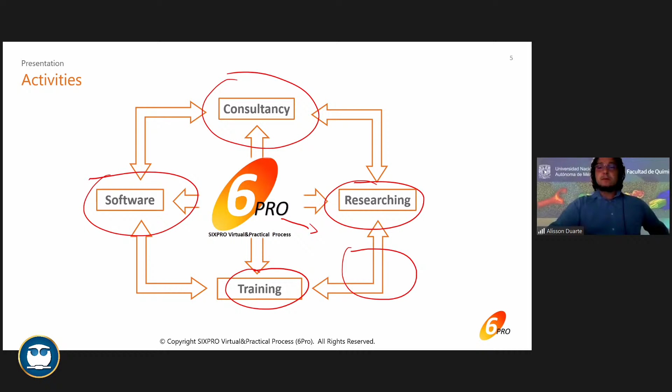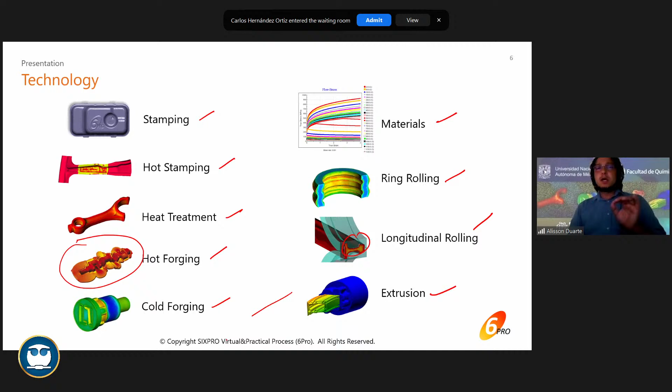Well, the main processes we work with are stamping, hot stamping, heat treatment, hot forging, warm forging, cold forging, materials, ring rolling, longitudinal rolling, profiles, plates, flat, and also extrusion. When we say extrusion, sometimes we have steel extrusion. We put that in hot forging. But when we talk about light alloys like aluminum, magnesium, and long profiles, then the extrusion has specific features that are needed. So that's why we make this difference between hot forging and extrusion, I would say extrusion of light alloys. All right.

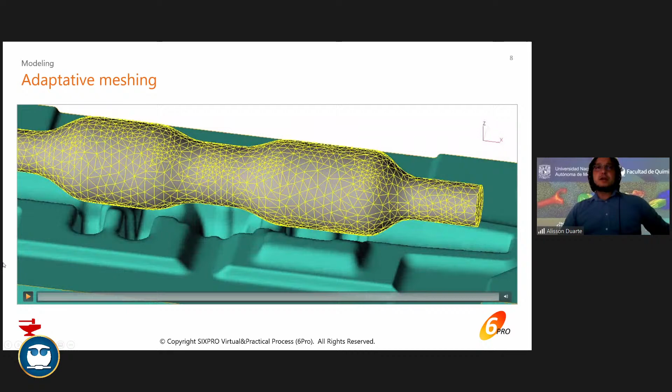So it's interesting that in this case, as you see here, the part forged is this here. This is all the part forged, okay? And we have this shaft on it. And as you can see, in these areas we have bigger elements, and this area here is a very thin area, so we have smaller elements over here, right?

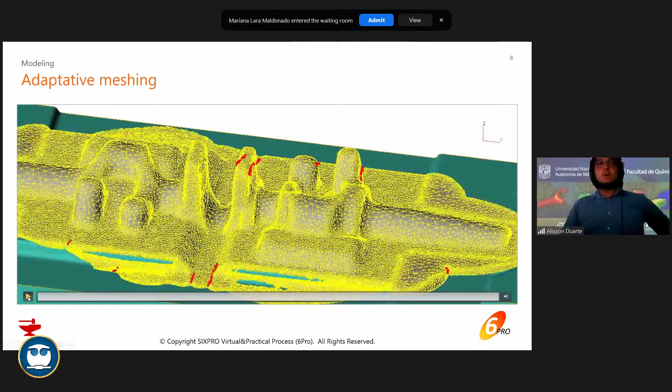So what we have in QForm is not a remeshing, no. It's a technology we call adaptive meshing, because the mesh is adaptive depending on the need, depending on the geometry, curvature, the strain distribution, temperature distribution. So we have this adaptive meshing. And here is an example of an open die or closed die forging operation. All right, so that's what we're talking about. So I will show this video one more time. All right.

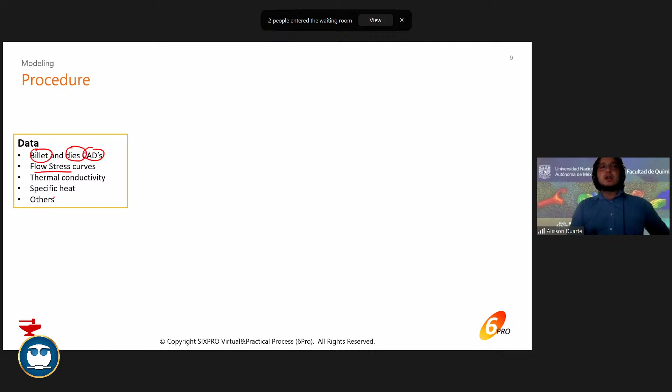Okay, in order to do this, we need some information. First, we need data. We need data for the material, and also I need the CADs for the initial billet, the dies, also the material data like flow stresses, thermal conductivity, specific heat, and others. Once I have those data, I need to set up the simulation. So positioning is important. Which type of equipment, let's say a press or a hammer, which are my process parameters, temperatures, furnace, which type of friction, heating, and other boundary conditions that are possible to include in the setup.

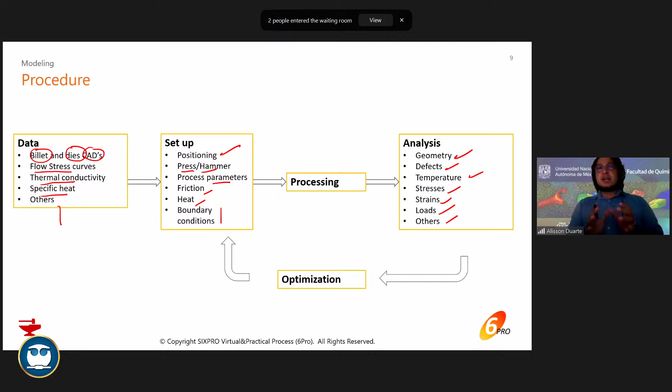Then the software works on it, okay? Then you have this processing. After processing, you can analyze geometry, defects, temperature, stresses, strain, loads, or you can analyze the dies. I'm going to show you a few examples here. It's pretty nice. And also, this is a simple way. When you do a setup, you process and you understand what's happening in the processes.

But in the software, we can also optimize parameters. We can optimize the manual setup of the simulation. So we are really working further here. We have, for example, API, and API is when you can actually put your software, QForm, in contact with other software. We can also think about putting it in contact with your presses, with your equipment. So you have this interaction between the simulator, QForm, and also equipment and other software. It's very nice. Sometimes you can even run a simulation without even opening QForm. So you do everything from other applications. It's very interesting, and it's really developed.

All right, I know it's too much theory right now, but let's go further so we will understand that. Temperature and strain rate: here's an example of the importance of having good material data, because if you get a material at 800 or 1100 Celsius degrees, of course the material at 1100 is easier to be formed. The material at 800 is harder. So you need to have information for the material for different temperatures. Also, you need to understand that for each temperature, let's say 1100 Celsius, the material can behave differently depending on the press speed, depending on how fast your process is.

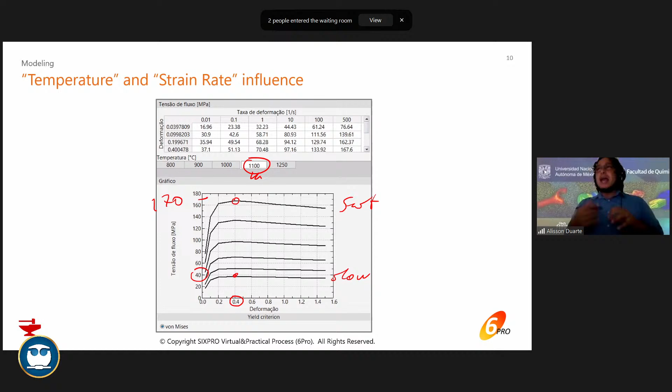If I do a very slow process, for deforming my material at 0.4 strain, I would need around 40 megapascal, right? So that's what I would need. However, if I go fast in the forging process, the same material at the same temperature, I would need a lot more stress. It means I have to apply a lot more force in the press. Also, the dies suffer much more because I put much more stress in the dies. It means you can break the dies, and these questions are answered when you actually simulate the process here.

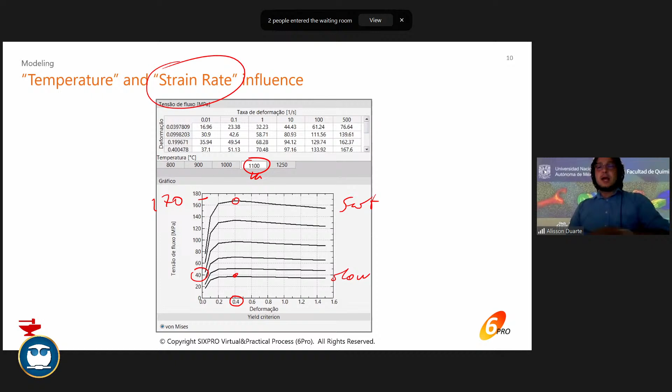So you work with different temperatures, different strain rates, and that's very important. And you understand the reflection of the results in the part, defects, presses, and also the dies. It's really important. Okay, so you have this idea of the importance of the press speed. Let's get here. This is a hydraulic press. This hydraulic press is going to be very slow, and it's a customer of ours. They do open die forging. So there's a huge bar here, and let's see.

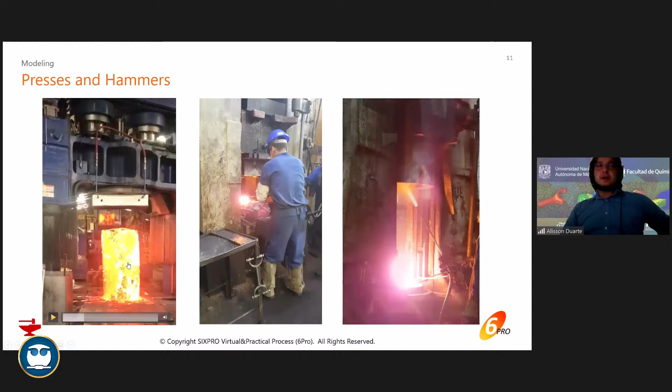I think it's enough. So we're going to see that it goes upsetting this big bar slowly. Then you have this mechanical, this is a friction press, and you can see. So it's interesting. Here you have two blows with the same die. It's faster than this process here, this hydraulic press on the left, and in the center we have this friction press, and you do two blows.

It's faster. Now here we have a hammer. So the strain, the deformation of the parts, it's really, really faster. And all those parts are at the same temperature, probably at 1200 Celsius. However, here it behaves differently. Let's see how fast a hammer can be.

Well, yeah, I recorded those videos myself, from our customers, and they allowed us to show it. And we have already simulated all of those processes. And it's really important to take into account the material behavior at different speeds, at the different strain rates.

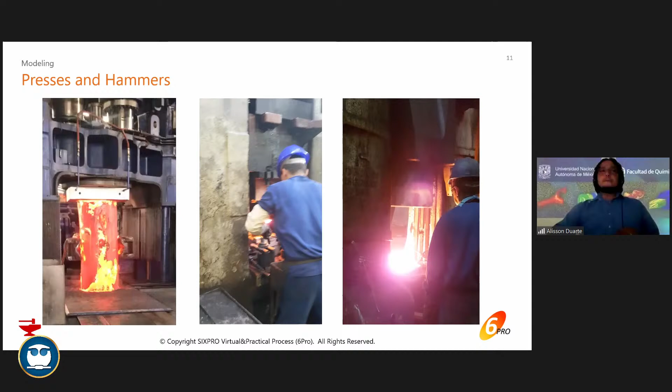All right. Okay. So how to get that material data? For forging, the most common way is to get, for example, compression tests. Compression tests, you can see here 5 specimens, and they were all compressed. And from those, we get material data.

That's one possibility. Another possibility is to get software that already simulates the behavior of the material that we need. For example, this is JMatPro. So in JMatPro, I can input the chemical composition and provide more information, and then I can export, for example, to QForm. It's possible. So you have tests, you have simulation, and here I'm not talking about simulating the process yet. I'm still talking about the material, because material data is important.

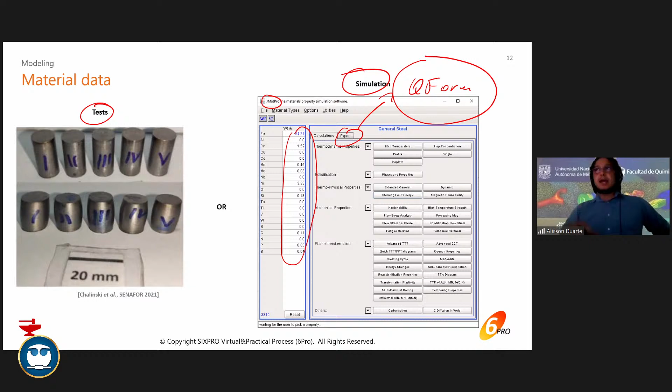QForm presents us a very large amount of material already there in the library. But here it's important to say this is only the flow stress. So I need this for different temperatures, okay? From 20 to, let's say, 1300 Celsius. And also for each temperature, I need, let's say, at least 6 speeds to have a wide range of behavior for that material.

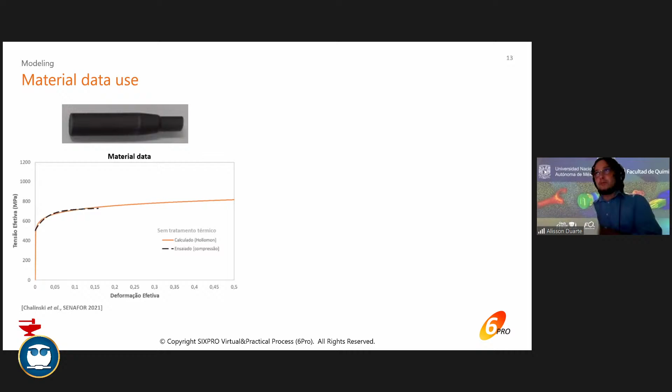So material is really important, of course. And here, from these, we got, for example, the behaviors, the flow stress data. So you have this experimental, and then from the experimental, you get this complete curve in order to simulate. Then we simulated that, and you could see that experimentally we had around 400 kilonewtons in the press. While simulating this, we got pretty close.

It's a real case, and it was very important to define before doing the experimental. We defined it with the company. This is one of our customers as well. If you want to see the paper, unfortunately it's in Portuguese, but the paper is there.

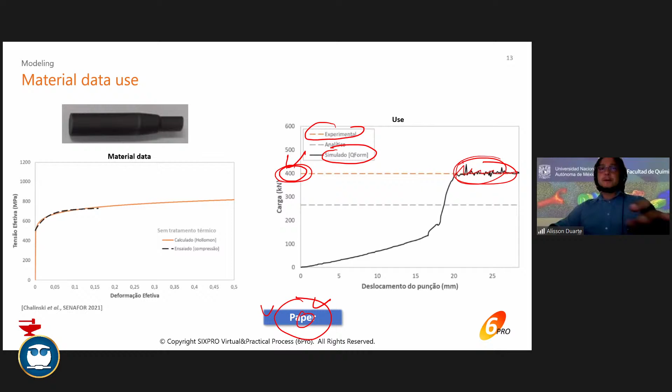Before going into the press, we simulated and we found the necessary load for the process. And when we went to the press, we saw that it was in accordance with the simulation. All right.

Also, it was a cold forging, so the matter of the dies is really important, because the dies suffer many stresses. So we also have to check at least the effective stresses in the die. So you can see here, the die is assembled from 3 dies. So 3 dies make the tooling.

And also this company has other dies here. They are shrink fit, other dies here. So they can decrease the tensile stresses in the dies, which is very important, and also decrease effective stress. It's not shown here because it's a matter of confidentiality. However, you have effective stress here.

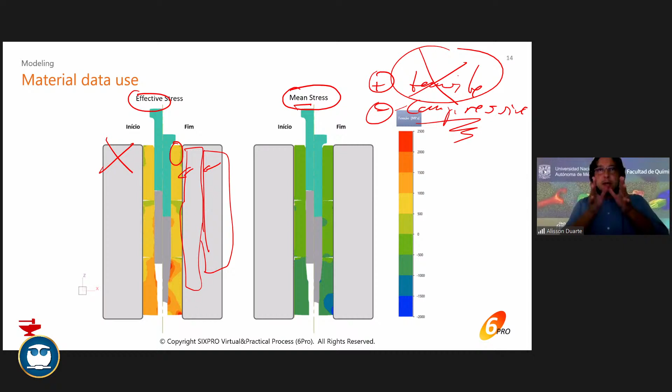And another important thing is to check the mean stress, because the mean stress says if we are too much in tension or if we are in compression. So the idea is to get compressive stresses rather than tensile stresses, because they can break the dies. It's very superficial here what I'm talking about, but we have much more, you can take a look into the dies and analyze those dies.

You can even define the number of blows, the number of parts until the dies fail or would break by fatigue, okay. So there are many possibilities. Okay, here, as I said, it was about the modeling.

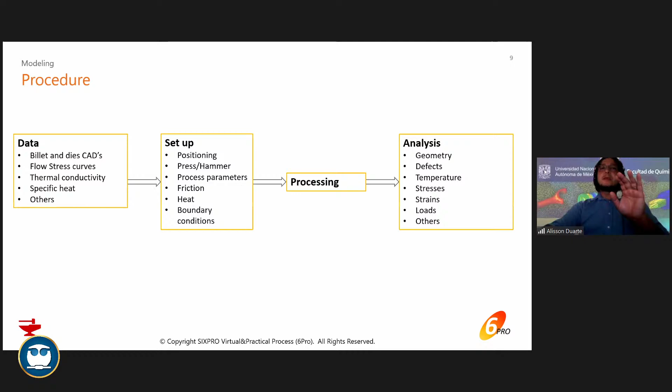It's a general idea. Now that I gave you the general idea, I'm going to show a few examples of what we can do with forging. I'm going to focus on forging. The first idea is we can conduct open die forging operations.

As you can see here at the top, I have what we call a manipulator, and it handles a big bar, and this bar is then pressed by dies. For simulating this, I can consider this geometrical manipulator, or to make it easier and faster, I can also use this graphic manipulator. The manipulator moves the part and rotates it also, so it makes it easier to simulate this process.

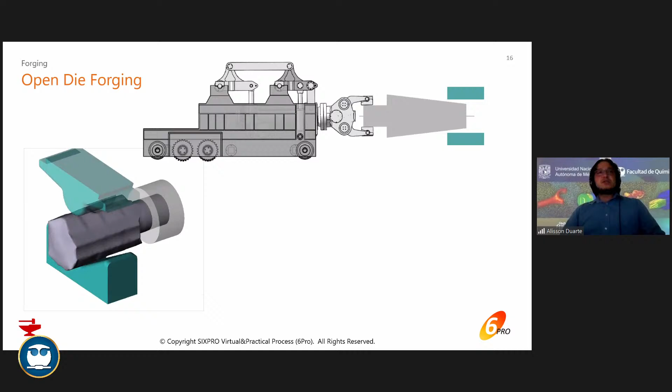So this is an example of open die forging. I was saying graphic manipulator, so you have for general analysis automatization of the simulation, to make it faster. Also geometric manipulator, you make positioning, sometimes it influences the shape of the forging or the part being forged. And so you can check positioning, heat exchanging, how the part loses heat to the dies, how dies can deflect during the forging process. You can check these and much more.

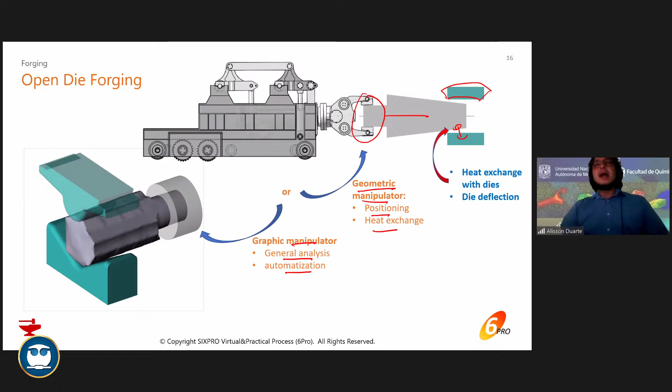All right, I already showed you this closed die forging for you to have an idea. This is also cold forging. As you can see, cold forging is very, very tricky, and we need to consider a lot of dies. You can see every die has a correlation to the other. Sometimes it fits, sometimes there is a distance between dies, sometimes there is nothing, it's just there. So as you can see, just to do this very simple part, a lot of tooling, a lot of tools, we need to do this.

I'm going to show this here. This is the final forge blow, and you can see here it's forging there. All right, then the final forging blow finishes the part.

Over here you can see the punch, how the punch deflects. Of course, it's pressing, there's a load, and punching the part, and you can see that this punch dislocates or goes more than 1 millimeter up. Also there is an increase in the diameter. It might be a problem or not.

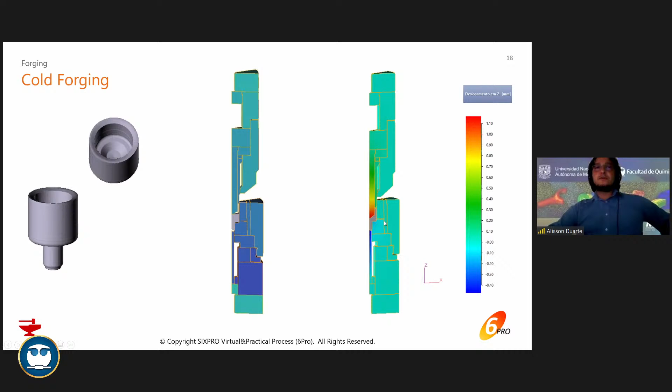Another type of operation, electric upsetting, is when you have one electrical contact, and there is electrical current passing through the part, so the part gets heated, and you do this forging by electrical upsetting. It's interesting, it's a possibility. Maybe a few people know it, but it's interesting.

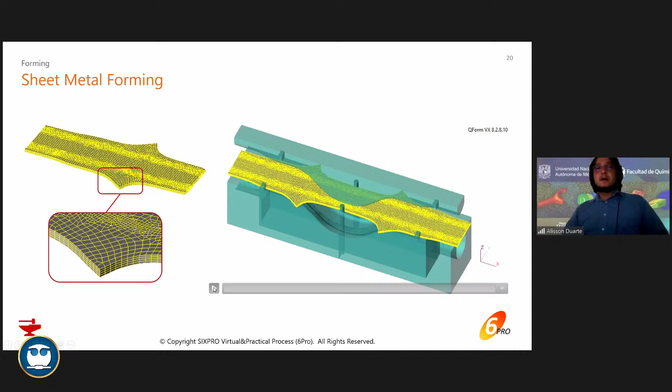Also I put here forming. You can also, I'm talking about forging, but you can also work with sheet metal forming. As you can see here, this part is going to be forged or stamped in order to get this truck part. You can see there, and you can actually design a much more precise part or a much more precise process. We do that every time for many companies, and it's pretty interesting. It's challenging, but when you see the part there working on a truck or working on a car, working on equipment, it's very nice, and the equipment is very nice.

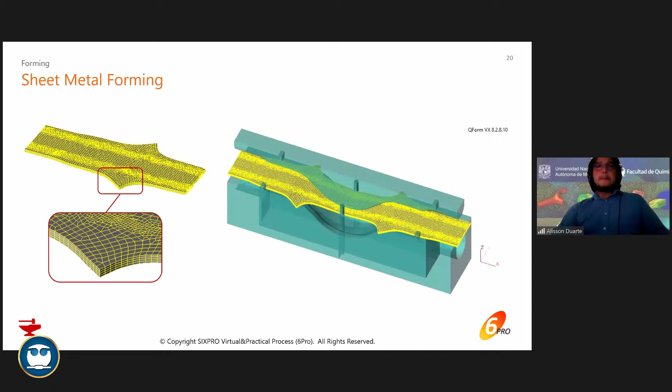Underfilling - of course, if you have a process where the metal doesn't fill your dies perfectly, you have a problem. For example, my part was designed to be here, also down here, also all up there, so there is this underfilling. It's a problem, so I have to work on this part in order to actually get the fulfilled part, and then I get the right final forged part. This is unacceptable, so it's a scrap, and you lose money, you lose time, and so on.

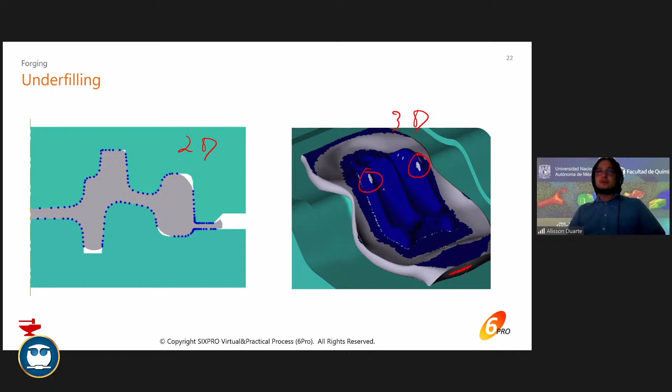This is a 2D view to make it easy to understand. You also have a way to check this by 3D simulations. It's very interesting, very nice.

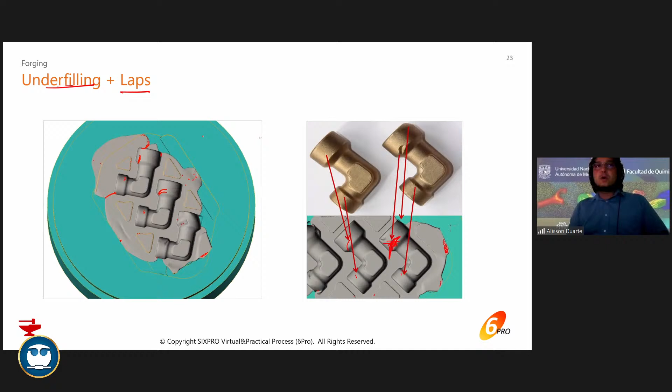All right, there's this together, underfilling and laps. A lap is when you have material that goes against itself. Like here, this part is coming to this part, so you have what we call laps or folds, and so you have underfilling, and some small laps here. It's a problem because a lap is like a crack, so it concentrates stresses. And when you use that part, it's going to break there, because a lap concentrates stresses. It's a problem, and we have to avoid laps.

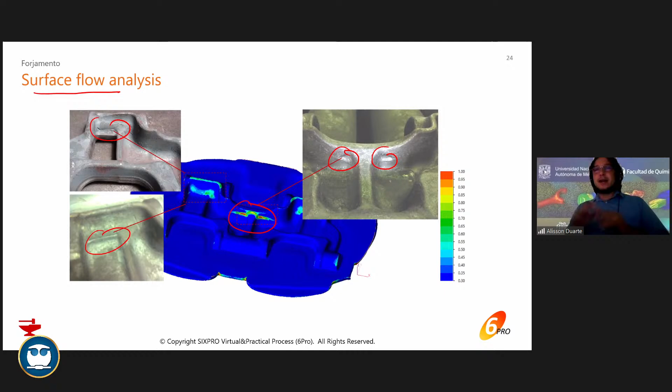Well, other analyses like surface flow analysis, you can see problems here. In a simulation, you can check by color. It's very easy to understand, to see it. You don't need to understand the actual finite element, you just need to understand the process. Nobody, if you don't have skills using software and codes, you don't need it, because the software is already set to provide you easily all the results you need.

All right, I showed you a little bit about defects in forging, now about die analysis. For example, if I have this die, it's a bottom die, you can see that I can check first of all the effective stress. You're going to see that I have very big or high effective stresses here, that are coincident with the areas in the die that will break.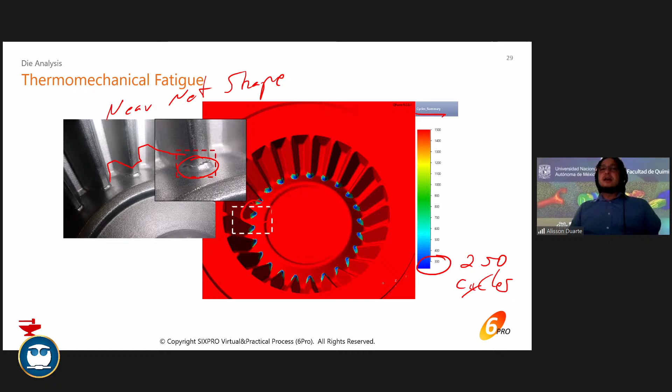Here they tried to optimize this gear, but there were too many stresses, and it broke here. And in the simulation, you can see that right in that area, the simulation says, all right, around 250 cycles after that, the die is going to break.

The die is going to suffer a fatigue failure by thermomechanical fatigue. And it's possible to measure or have this dimension in the simulation, like an average amount of parts that I can forge before it breaks. But this is very, very critical, and sometimes the companies go there and try it by trial and error.

But you need to conduct the simulation because those dies are very expensive.

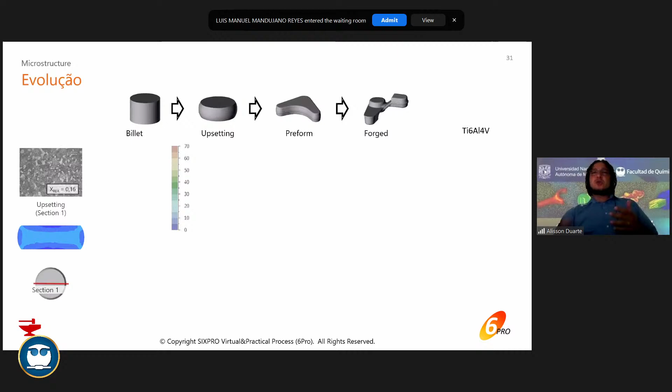Also, you can check microstructure. I'll show you an example here. I have this billet, then the upsetting preform and the forged part. You can check the grain size because you have a scale, and you can check the percentage of recrystallized material. As you can see in this micrography, you can check the same areas and understand how the grain recrystallizes, how the material recrystallizes, how the grain increases, and how much it increases or decreases. That's very interesting to check in the simulation.

I'm talking about this very fast, but I'm going to provide this presentation to you, and also some videos. I will also make a comment about heat treatment.

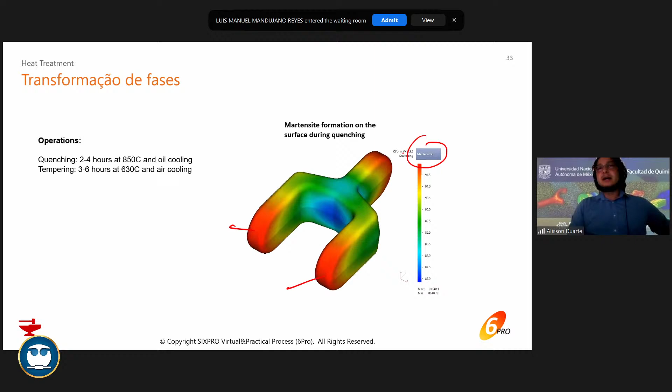It's important how, for example, we can check to conduct quenching and tempering. Here is a fork for the aerospace industry, and here you can simulate the amount of martensite. In areas where the cooling is faster, you have much more martensite, and where the cooling is slower, you have a lower amount of martensite. Then you have this distribution of final properties like hardness and mechanical resistance. So you have all of this. In this case, we have this checking point here, and you could see a lot of martensite there.

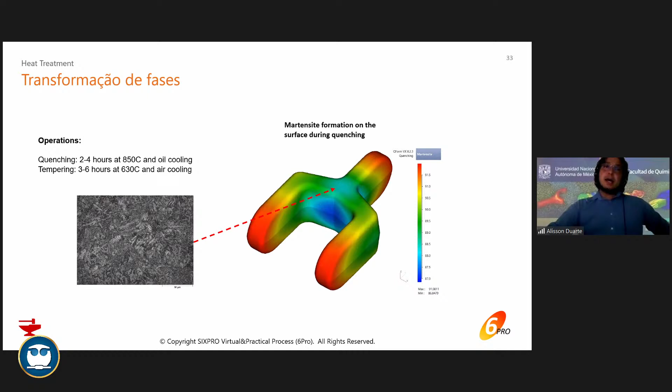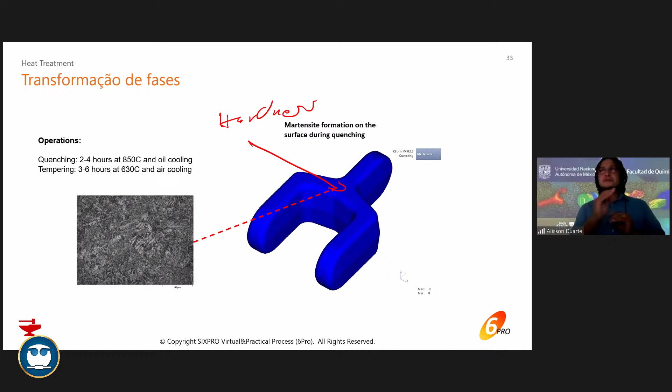We did also one trial because, let's say, you have a specification of hardness, and you say, okay, I have my process here, very good. However, the material has a range of chemical composition, and that changes everything. It changes the transformation curves. For example, for the same alloy, if I take the bottom limit and the upper limit of that alloy, at that point I can get from 430 Vickers up to 600 Vickers, which is very wide, sometimes not acceptable. Sometimes you say, okay, I'm going to do this heat treatment and make it work, but sometimes it's not in your hands. The material can provide very different results because it behaves differently.

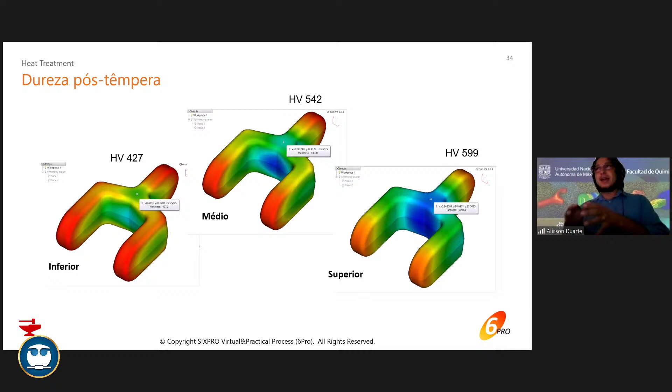It's important that we simulate this beforehand, because I have to design a more stable or robust process. I have to understand that the material can provide this wide difference, and then change the way I do my process to consider that variation and have a more stable final result. By simulating heat treatment, you can simulate a lot of different processes and variate a lot of variables. This is important because most forged parts are preheated, or heat treated afterwards.

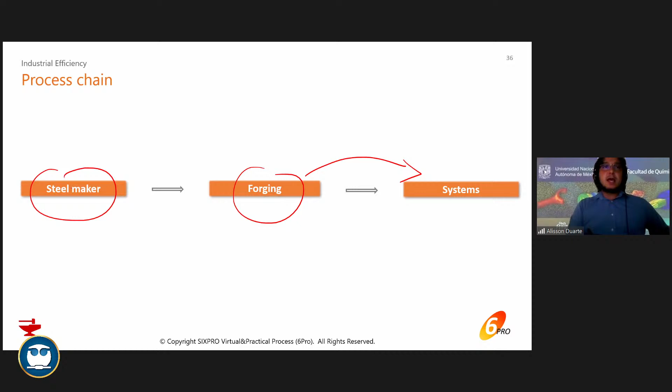So I'll go through this process chain in industry. It's very easy: I have the steel maker, then a forging company that purchases steel, and then it forges and goes to some companies that mount or assemble it, like automakers or truck makers. So we can simulate forging or forming everywhere.

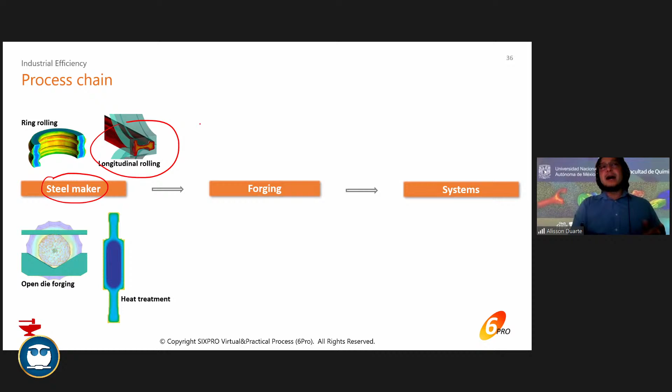For example, the steel maker many times also rolls. So if they have a siderurgy, they roll their own steel before selling it. You can roll it and sell bars to the forging industry, or sometimes sell rings, or sometimes sell very big bars, probably heat treated. So the steel maker, before forging, already uses steel forming to provide good parts or good billets to the forging industry.

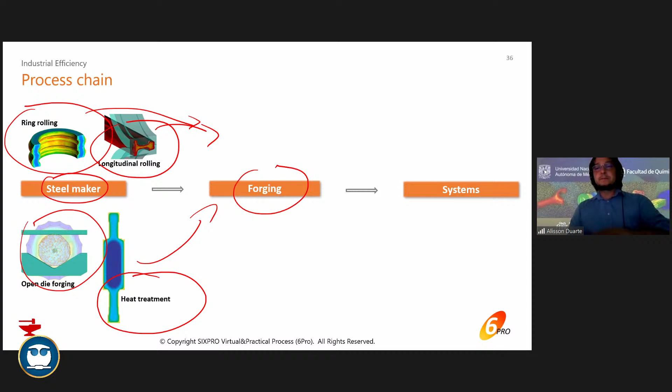In the forging industry, you can also have open die forging, closed die forging, heat treatment, ring rolling, depending on each company. Forging also sells the parts to other companies, like that fork I showed you with machining and a lot of heat treatment. And this simulation tool can be used in every part of this industry chain.

I'm going to focus only on the forging and customer of the forging, the systems. For example, I'm getting some examples that I can show to you here. So here you can see the shaft is a gear shaft. It's big. So what they do is they forge it and then they heat treat it, right? And here you have the final microstructure. It's simulated and also heated by simulation.

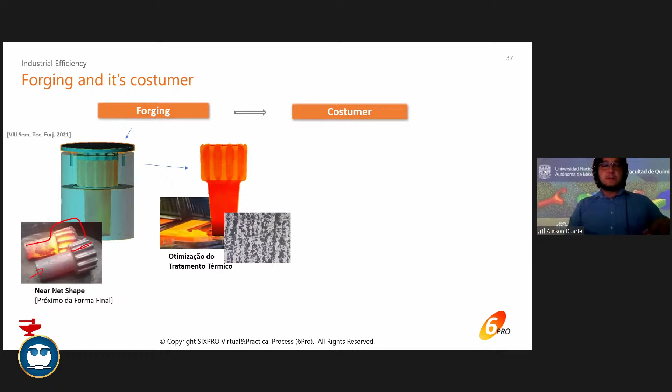So here's the forging simulation. Here's the heat treatment simulation. And it's interesting because they used to do big parts like this without those teeth. And now they are much closer to the final, so they use less material. And it's very important. I'm going to show a video to you in a couple of minutes.

And then they were thinking, well, do I really need to heat treat this part after forging? So they conducted it in the simulation first, they controlled the cooling of the forging part, and they figured out that they could do an innovation, like they could sell the equipment. They were heat treating that before, but they found out that they didn't need to conduct heat treatment anymore. So they decreased a lot the costs of the process, because they were much closer to the final part, and they didn't need to heat treat anymore.

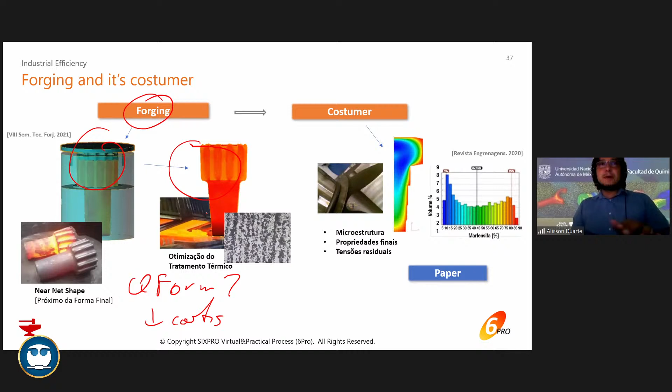This was really nice. And it's interesting because their customer also used QForm, but with a different idea. You can see the forging was forging and heat treating, and okay, QForm, how can I reduce costs? And then figured that out. All right. So their customer, you can see, this is the same part. This part here became this part here. So this customer used QForm

for analyzing residual stresses. So residual stresses were there, and they checked that. They could check the distribution of martensite, for example, the volume of martensite distribution. You can see much more martensite in the surface, of course. And if you're interested in checking this, there's the paper here. As I said, I will provide you the PDF of this presentation. Then you can click there and find the paper. All right. My idea here is to show that it really makes sense using simulation.

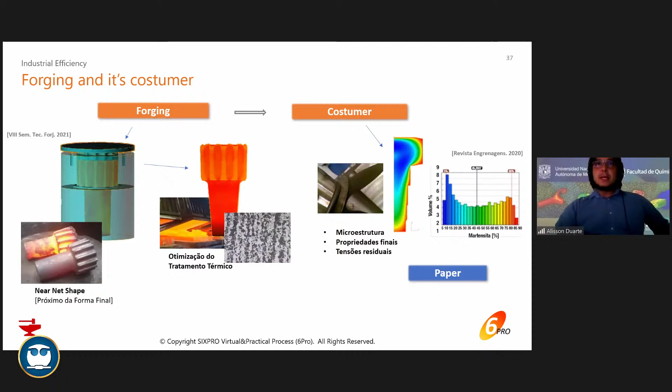Okay, here is a very short video of the company. One of the companies that I showed there is called Uniforja. It's not in Spanish. I'm going to put these subtitles in English here. It's very short, it's 1.5 minutes. I'll show it to you here right now. All right, okay.

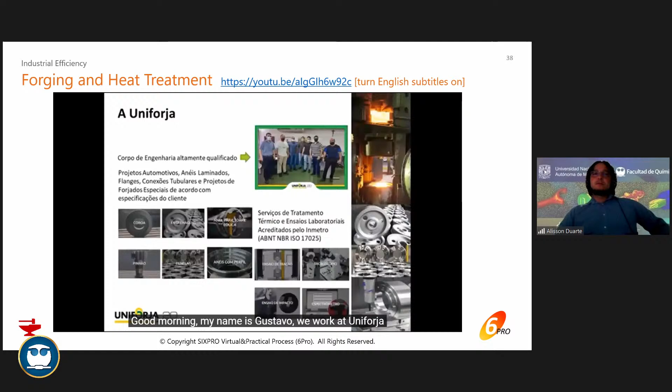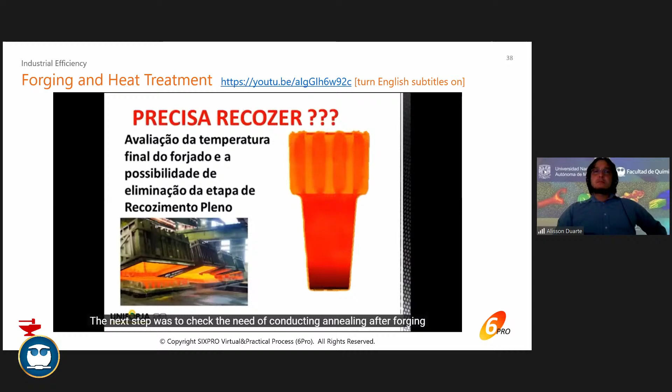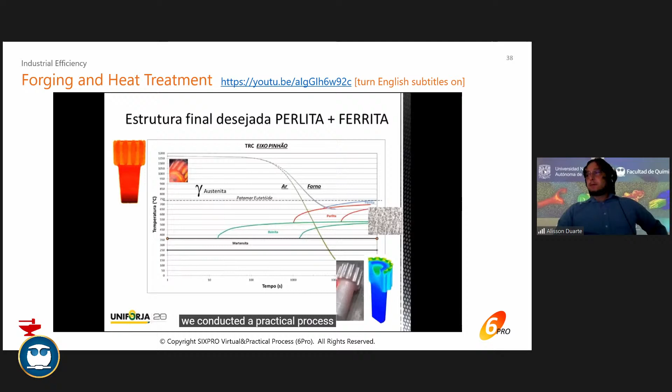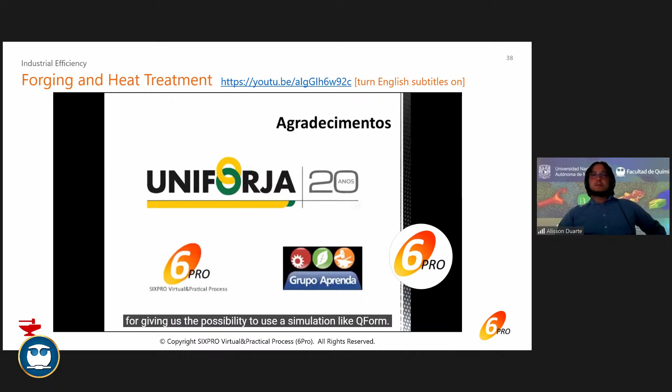Bom dia, pessoal. Meu nome é Rodrigo. Bom dia. Meu nome é Gustavo. Nós somos da Uniforja. Projetos de forjados especiais, de acordo com a especificação do cliente. Vamos falar sobre 3 casos de estudo, né? Como pode ver nessa imagem aí no canto inferior direito. É uma pré-forma. É um eixo dentado, né? Diminui o tempo de desenvolvimento, né? Uma próxima etapa, posterior à etapa de forjamento, seria a etapa de verificar a necessidade de um recozimento. Então, a gente avaliou a temperatura de saída do forjamento. Através do QForm, a gente fez um mapeamento da taxa de resfriamento ao ar e também da taxa de resfriamento ao forno. E aí, seguindo nesse patamar isotérmico, o final da estrutura vai ser perlita. E para validar todo esse processo de simulação, nós fizemos um processo prático e verificamos sua microestrutura. Nós obtivemos o resultado satisfatório, de redução de massa em torno de 15%. A gente reduziu o tempo de tryout, não fazendo por tentativa e erro. Também conseguimos a eliminação da etapa de tratamento térmico através desse resfriamento controlado. Então, a gente tem a agradecer à Uniforja. Nossos agradecimentos aí a 6Pro pelo apoio e toda a parceria aí desenvolvida.

Of course, this is a short version of the speech, but at the end of the video, it shows their entire speech; the lecture is very nice. But it's important that they reduced 15% of the steel that they were purchasing.

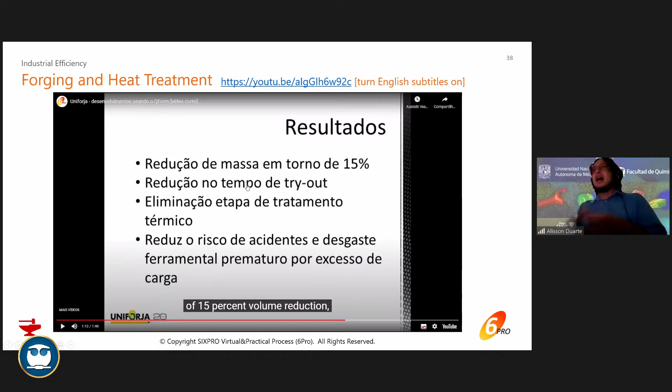That's too much. They reduced a lot the time of tryout, like trying to get a part out to be sold. Also, they eliminated the heat treatment, and they decreased a lot the chance of accidents. That's really important in the industry. And also they reduced a lot the wear in the dies.

You know, it's in English here. It's interesting if you have that. If you want to check that, just go in the PDF and click here. Turn the English subtitles on, and that's it. All right. So this is one case.

There are also other companies that reduced, for example, 14% steel cost reduction, die life increasing, operation reduction, the number of operations, they reduced it. Workforce reduction, like less employees, less cost, and they can have a wide possibility of different geometries with the same process. It's all possible because of the simulation.

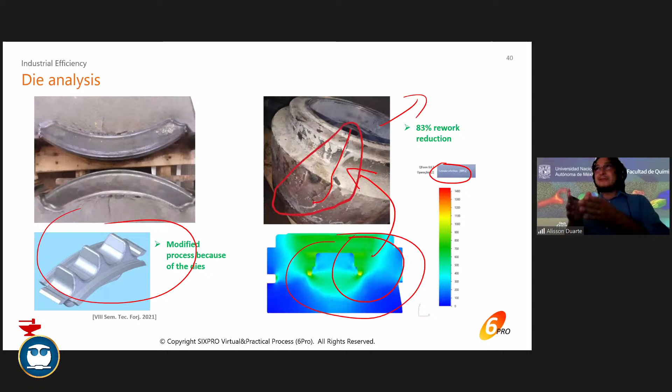So it's much, much more efficient if you simulate all of this first. Or sometimes you have a problem in the line, or like I said before, you want to reduce costs for a process that already exists. So you can simulate in order to get better conditions, better processes. Here is also a short video. This guy here talks about the importance of analyzing the dies. I'm going to show this.

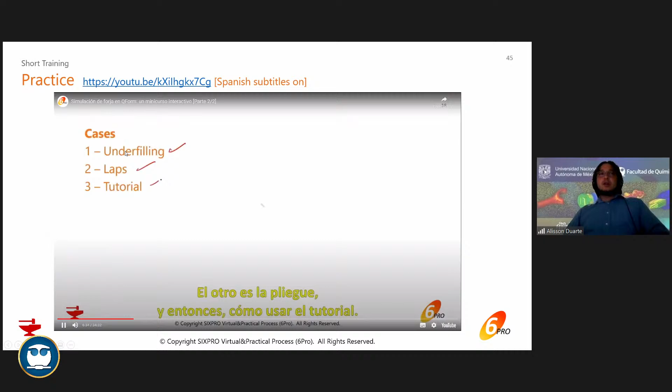And finally, here I'm just talking about forging simulation, but there is a very short training I gave to another university in Mexico. And some guys put Spanish subtitles. I cannot say they are right, but I can say they can help. And as you can see here, predecir. Just one second here. You can see, showing possibilities of underfilling, and maybe you'll be able to work by yourselves. It's like a short training.

But if you check this complete video, you're gonna see that at the end you have QForm. You have also a step-by-step tutorial that's very easy. So any student doesn't need to know process, doesn't need to know materials. Any student can do a simulation. And finally, as I said, I'm gonna give you this PDF.

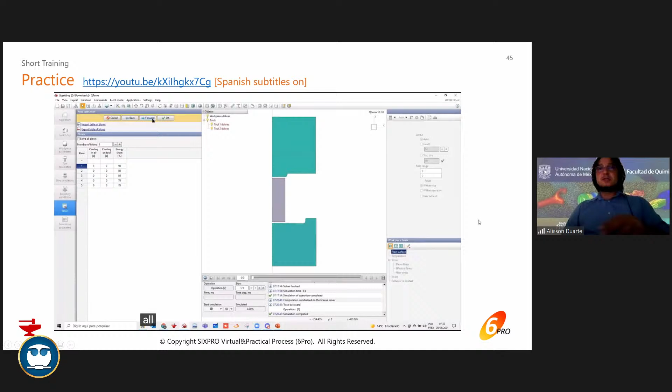And then you take a look into those guys' reports, and you're gonna see how they thought, how a good report should be. And then you're gonna increase your networking with many other students, and also researchers, professors and doctors that are very focused on helping students everywhere. That's my case, helping students everywhere, working on forging simulation. So there is a lot of information in this PDF that I'm going to give to you. And this is the end.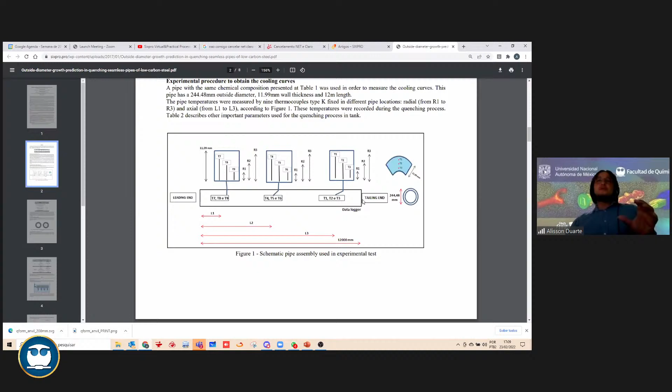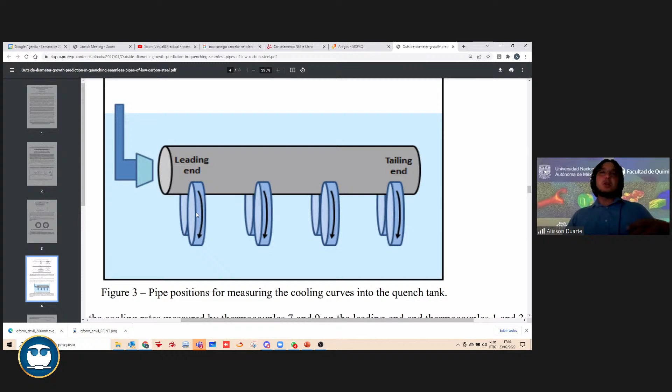This is a paper we wrote with this company named Vallourec Sumitomo Tubos, VSB. They had to produce those types of tubes that are really long and have many, many problems because they can be oval, they can be not linear. It's crazy. And after rolling the tubes, we also have to quench them. And it's completely crazy because it's a very long tube. So you have to send water in the middle and then turn it. So this is interesting.

I'm talking about the most challenging work. But if I answer your question directly, like shape, then I can talk about gears. Gears are the most challenging parts we have ever done. Also shafts. I have a lot of those examples, but only some of them the companies accept to publish. So let me show you one example.

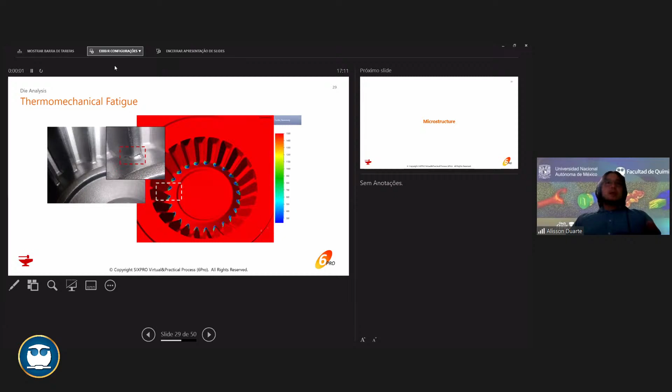There was one time I was in the US working for a company, and there was one gear very, very similar to this one. That was really tricky because it's not only a matter of shape, as you can see, we had to achieve the best condition. So to get very close, but you still have this possibility here, and then we have to work with the dies and do assembled dies.

And it's really important because, for example, you see that is a complete die, and this die is only one part. And I can work in such a way that I can pre-divide this part, using a divided tooling, in order not to break it. So the possibilities for gears, in this case, are very wide. So those parts are very challenging. It's not just a matter of simulation.

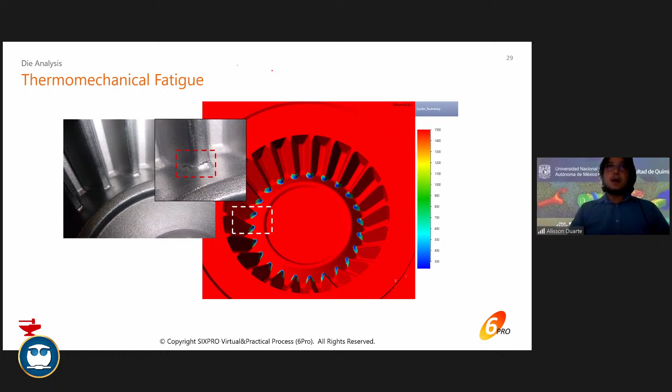Sometimes you have to worry about, let's say, scale, about oxide. And that's also important to understand. Sorry for the long response. Sometimes the idea is to do not a hot forging, but warm forging. If you do warm forging, you have all types of problems, and the stresses in the dies are going to increase a lot more.

But you're going to get a material that has a higher mechanical resistance. So I would say that every time that I get those gears, they are more challenging, not only because of the geometry, but because we want to get as near as possible to the final shape. I don't know if my answer is okay for you, but that's it.

Thank you. Another question from Miguel. Has this technology ever been implemented in a real-time process in the industry? Do you see this technology being implemented in a real-time process in the near future?

Good question. Please just let me... Okay, I'll show you this here. Second. Second, I'm opening this presentation here. It takes a long time. No, already opened.

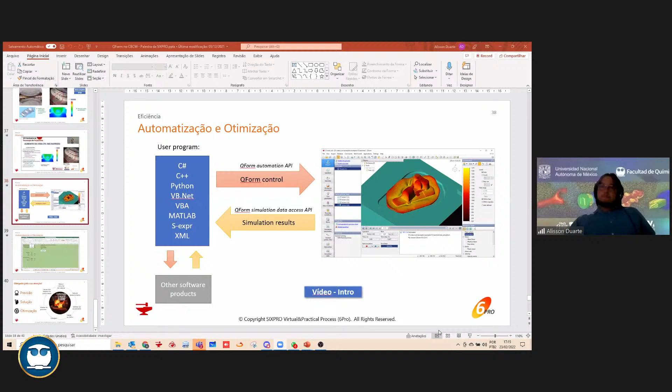When you ask me about real time, let me show you this. This is the idea. The idea is that this is QForm, right? Okay, this on the right side, this is QForm. And you can see this part. You can see it's a complex part. Yeah, it's complex, but you can get there.

Talking about the last question, like, what's the most complex part? I think that it's a matter of working. If you can work with CADs, it can handle that. But you have to understand, when it comes to the dies, it gets more challenging. That's why those gears are more challenging. But this is a kind of complex part, and you can already use the simulation for talking to any software you want.

And when I talk about any software you want, you can talk also with sensors. So let's say you have a software, you want to get QForm simulation, like preparing results with your software. So another software says, okay, I want this. You send some ideas and it does the simulation needed. Maybe you should not even open QForm, and then QForm does some analysis and gets it back to you.

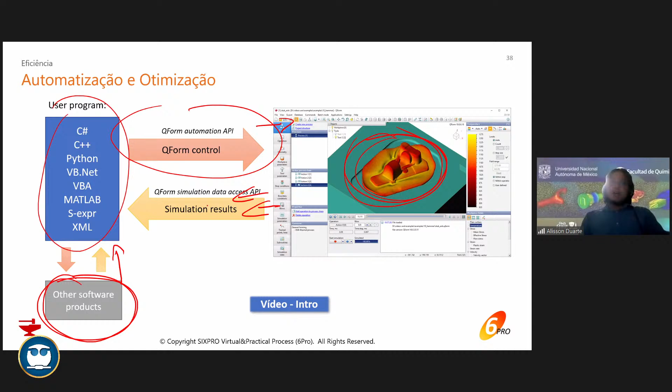Why am I saying this? Because the same idea is, let's say you did a simulation and have a result. Okay, it goes to the process, good results, and this is going to be implemented. However, in your press or your rolling mill, you are measuring temperature, velocity, thickness, dimensions, and you are getting all of this and bringing it back

to your system. And you're going to say, well, I am considering the temperature, let's say in the second operation, to be 1100 Celsius. However, I am measuring in my press that the temperature is actually 900 Celsius. That's a problem because my mold is not appropriate and the dimensions are not very good.

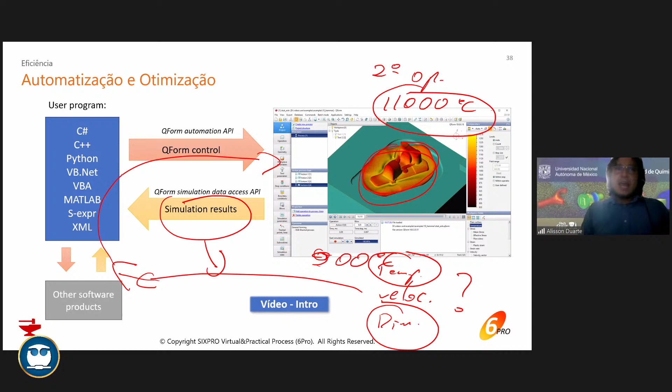But you read this and inform your software that something different is happening, and you correct it in real time, and then you can find better results and change some variables, to stop considering what you were considering before because you thought that was the temperature, and now start considering the real temperature.

It's just an example. So I understand by real time, of course, for simulation we have some time to simulate, but we have already gotten to a certain point where we are working, talking, and putting everything together, and also learning, and also using artificial intelligence to help us work on this. So what I would say is that you can predict, you can give solutions, but you can also optimize.

When you talk about this real time, I'm looking in this direction. I hope I answered your question very well. And if not, please let me know.